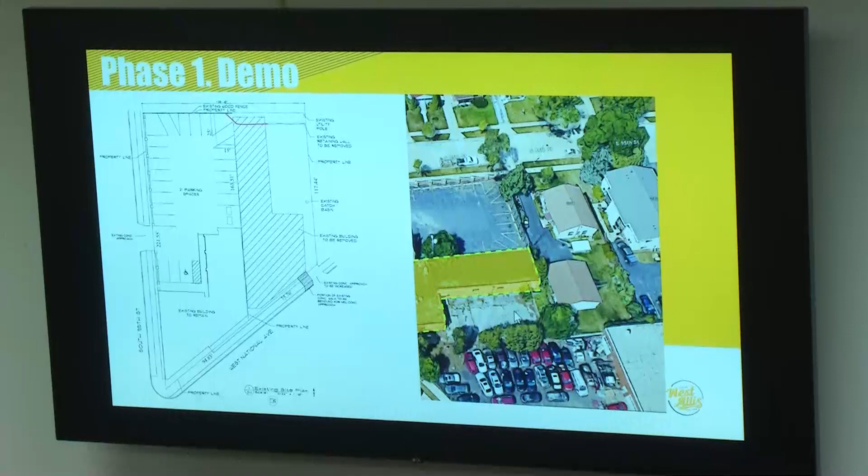But this plan just shows the demolition of the building, and then back here you can see some existing site features, an existing retaining wall here on the site, and the building is actually helping retain some of this grade difference between the residential property and the 9422 property. So when that building goes away, there's an interim plan to install an interim retaining wall, using 2 by 2 by 4 blocks, these heavy blocks you see sometimes on construction sites to shore up earth in a temporary manner. And then once the site is stabilized and the new parking lot goes in and starts to work, at the same time they'll be putting in a more permanent retaining wall along this side.

So here's a look at the site plan. One of the differences in the site plan is that the retaining wall was initially shown up here along the very north property line. Since that time, the plan is going to be amended. We'll be getting a revised plan, but essentially keeping the same amount of earth here and not putting in these stalls. In other words, the new retaining wall will be down in this location here. Some of these landscape islands will have to be amended, but the new retaining wall will be here, and then marry back up where it comes back into the normal grade between the two sites.

And then a new 6-foot high fence would be installed here, and also along the east side of the property. The refuse enclosure would be relocated from here over to here, and is also screened within a 6-foot-high wood fence.

Along the frontage of the property, there's a proposed landscape area and a landscape island within the site. This is a view of the retaining wall and fence along the north side, shown at about 2.5 feet tall, but that may change and vary in height as revised plans come in. With this earth being kept here, that will help further secure and shore up the property to the north, so it won't bear as much load. The earth will bear most of the load, and the retaining wall will do the rest.

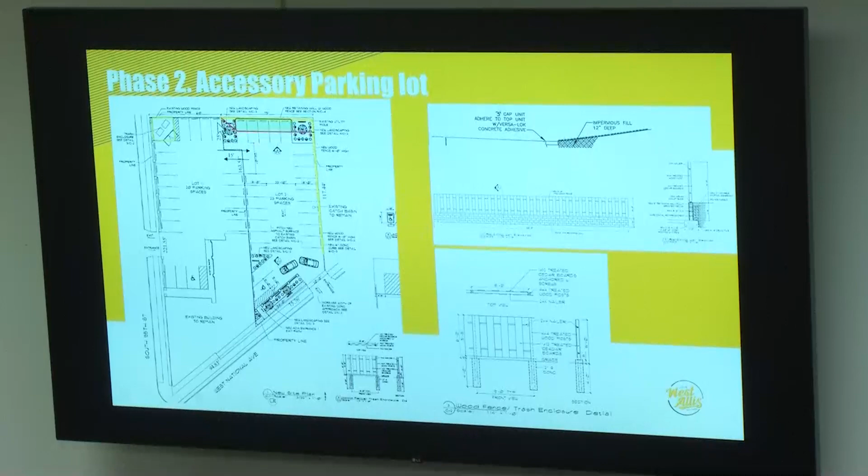That's the location of the future permanent retaining wall, and this is the interim wall that would be installed as the building comes down and this part of the building goes away. Those large 2x2x4 blocks would be installed here, again just so we don't compromise anything on the residential side and lose anything to erosion or load.

Let me just go back one too. This might help.

This is the garage to the north, about 4 feet away. This is the overhang shown here, but the wall of the garage is about 4 to 6 feet north of the property line. Here's the existing retaining wall that will eventually be replaced with a permanent wall. When the building goes away, the interim wall will go in right here, and then the permanent wall will also come across this area to take the place of what the building is doing now. There will also be earth in between the new wall and the property line, to further stabilize the site.

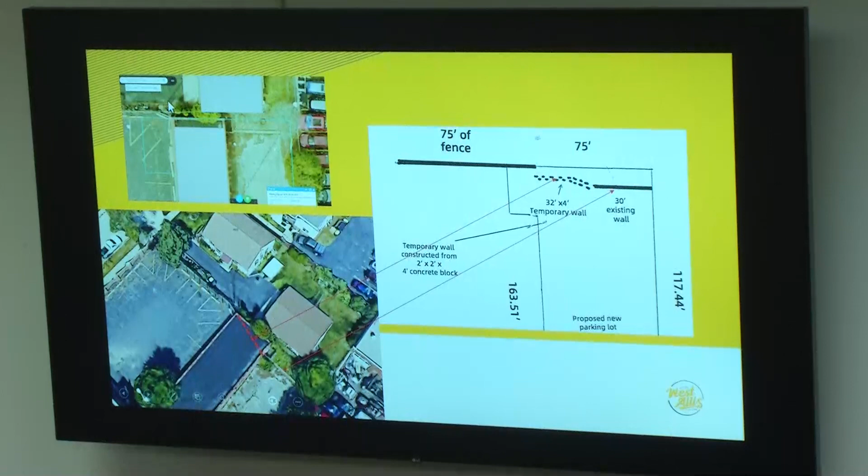So the revised plans we'll be getting as a condition of approval will be better at alleviating some of the concerns of the property owner to the north and further stabilizing the site for the future parking lot.

And then just a closer view - what we're looking at here in the bottom is a detailed view of this landscaping island along National Avenue. It features a decorative wall in the backdrop, and then landscaping with some ornamental trees, perennials and shrubs up in front, and a small terrace of grass in front of the landscaping area, with the sidewalk here.

There'll also be a cut-through from the parking lot out to the public right-of-way. So if you park here or anywhere within this lot, you could walk out to the sidewalk and into the main entrance of the business.

The wall will be a brick masonry style wall with piers and ornamental fence along National Avenue. And then this is the variety of landscaping that was shown - it's about 10% landscaping of the overall site, or probably a little bit more with this added back in.

And then when this building goes away, there'll be a stain on the east side of this wall. But the idea is, I think there is a little bit of a gap between the two buildings, so this will be evaluated at that point, and the idea is to clean it up and, if necessary, reinstall brick to match on this east wall of the Heartbreakers building.

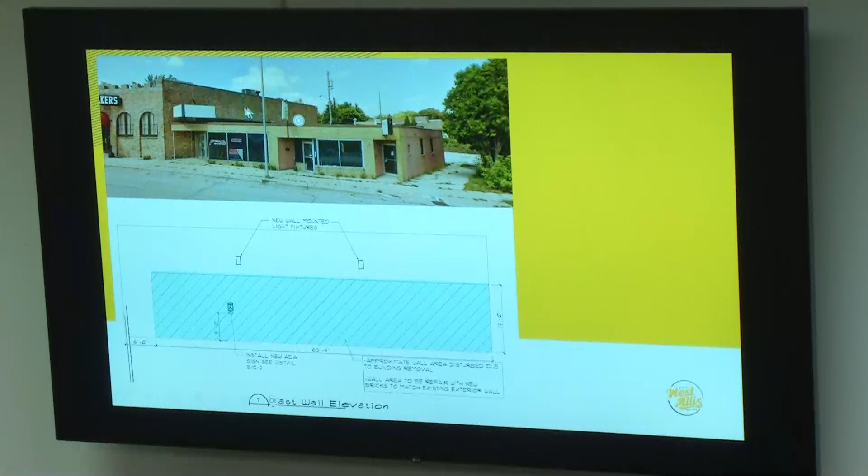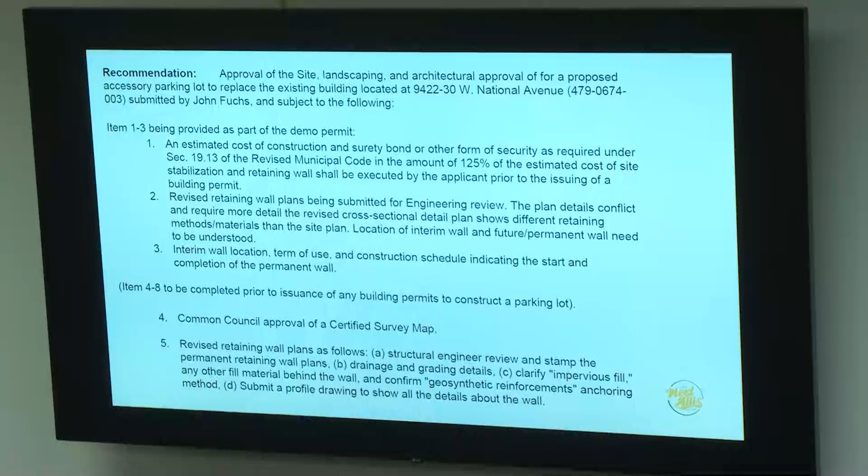So we're recommending approval, subject to the conditions in the staff report, items 1 through 3, broken into two parts. The first and biggest priority is to start demoing the building. We're asking for an estimated cost, a surety bond or letter of credit, and revised retaining wall plans to work out some clarifications, showing more detail on the interim wall, and also the timing between when the interim wall and the permanent wall will happen. We want to get that detailed.

Other than that, once the building is down and the site's stabilized, before the parking lot can commence, the two properties, which are separate right now - the Heartbreakers property and the 9422 property - will need to be combined into one lot of record. It does have common ownership now, so that clears the way and makes it easier to combine them via certified survey map. That will require council approval.

And then we just wanted our city engineering department and planning department to get a little bit more information on the structural capacity of the new retaining wall. I think a lot of those concerns have been somewhat alleviated, but we're still asking for confirmation of the structural integrity of the wall.

And then drainage needs to be explained, and then just clarifying some of the other details shown on the plan, just for a better understanding and comfort level of next steps going forward before the parking lot goes in.

And then this last item, item 6, is just in terms of the site plan itself. We're recommending a right turn in and right turn out from National Avenue. We really don't want left turns out of that new parking lot area or left turns into it. National Avenue, while there's been some major improvements for safety and aesthetics, it's still somewhat of a dangerous move to make that left turn movement.

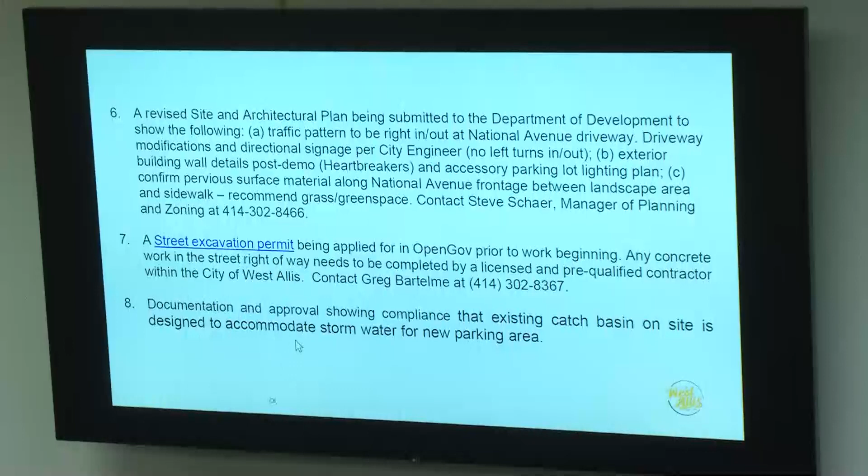Hitting the driveway or street excavation permit from our city engineering department, and just clarifying the catch basin that's in the parking lot just east of the building that's going to be demoed. It needs to be sized properly, and I know Mike's been taking a look at that catch basin right now, trying to get the right size lateral into it, so that'll be taken care of. But it's just a standard referenced item on this for approval.

So we recommend approval of item 1, of the demo and of the future parking lot, subject to pages 3 and 4 of your staff report, which are shown here. Thanks. Any questions? We can open up the discussion if needed.

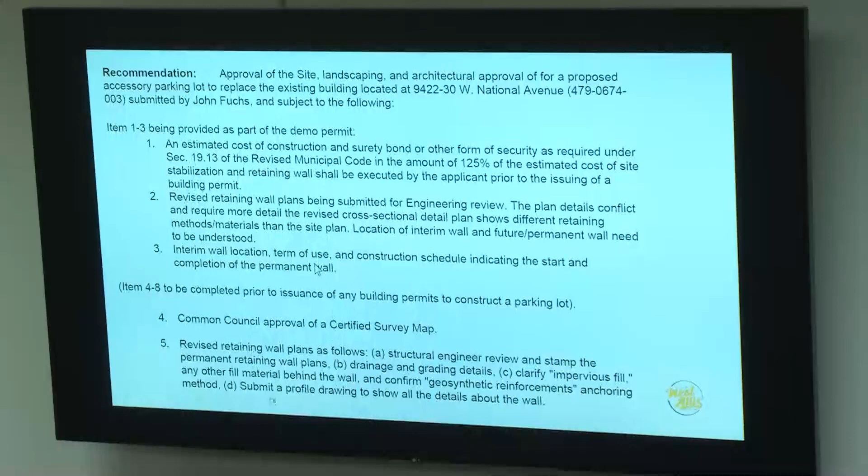Go ahead, Wayne. Mr. Mayor, thank you. Steve, go back to maybe the second slide you had. Sure. No, is it this one? No. That one? Yeah, right there. Okay, sure. What is, this is outside, this is to the east of the subject property.

What are all those cars in the lower section of that slide? Oh, that's the next door neighbor at 9400 National. I mean, what is that? That's the auto body shop. Is that Concours? No, this one is the other way, it used to be Besson Auto Body, and now it's something else. It's a new owner, new operator, and yeah, it's been a thorn, I think, in the side of our code enforcement department and planning department for years.

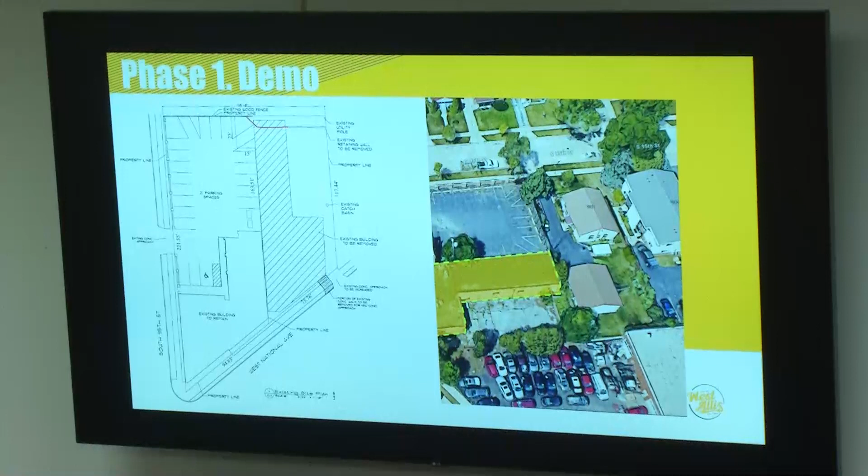I'm not sure, now that picture could be a bit dated, but it still looks like it. It's probably close to it. Maybe a few more cars, maybe a few less. Looks like about the same. It looks like a city junkyard. Yeah, and that's towing. Towing would not be an acceptable condition of approvals. Thank you. Sure.

Any other questions, Brian? Any addition, like for lighting or anything like that, as you're expanding out? You guys have, it's gonna be added to the new plans. And it'll obviously not splay over to the property shown there. It'll be contained.

Most likely it'll be added to the building, kind of like what he showed us, probably the best way to do it. He showed that on, I think there was some, on the top? No, where were they here? Further down, I think. Right there, some, yeah, one here and one there. Okay, try to get one on the backside too, so yeah, it covers the other parking lot.

It'll be, I mean, it's really important to make sure you keep those directed downward as best possible. We've received lots of lighting complaints on some new projects, especially with the neighbor to the north being up a little higher, so some of their windows may actually be over the top of that new fence going in back here. So especially in the back, try to get those lights directed downward as best possible. I know you've got to provide safety for your customers coming in and out of the place, but at the same time, it would be respectful to the neighborhood too.

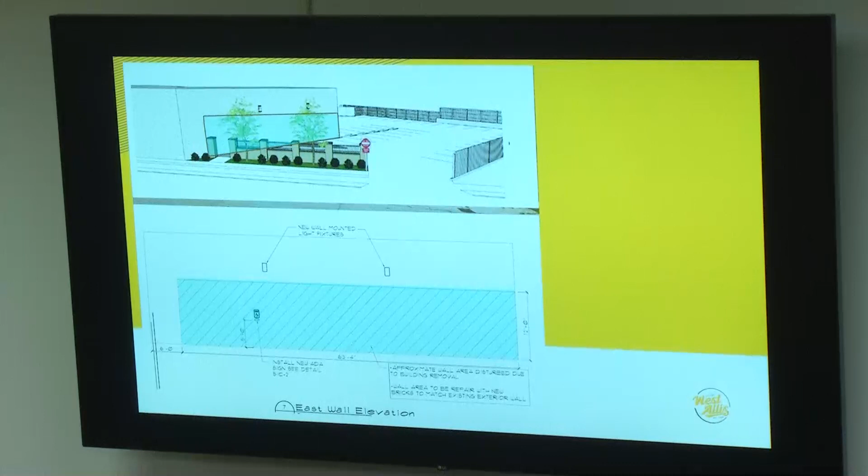Yeah, there we go, like this. Oh, okay, yeah. I never knew that, I don't know, I was just questioning, no problem, but I mean, yeah. It's, I guess we don't have to repeat what was done 40, 50 years ago. We can maybe just do a new looking wall that's complementary in color maybe, or something like that.

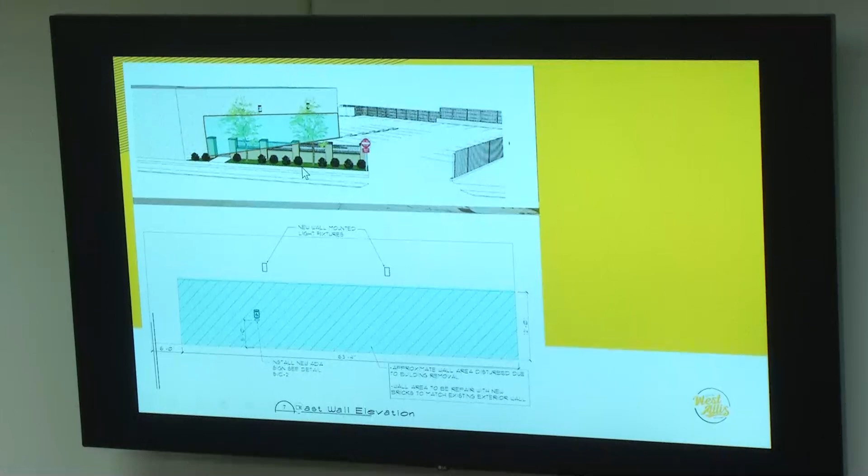Steve, could you go back to the current image? There, that one, yeah. I know at Heartbreakers there's not a lot of landscaping opportunity, but it looks like there's better maintenance opportunities at this new plan than there is right now. I think so, yeah.

Has the whole parcel been kept up, and have we had any complaints about their landscaping? It's been whatever's supposed to not be much there, just some potted things, the little right? shrubs, there's a couple spireas in the front, and some hostas, that's about it. But that little square right underneath that first arched window, yep, there's little 2x2 squares along there. It had some rotted granite in there for a while, but everybody throws their cigarette butts and everything else in there. What about the turn out of the parking lot?

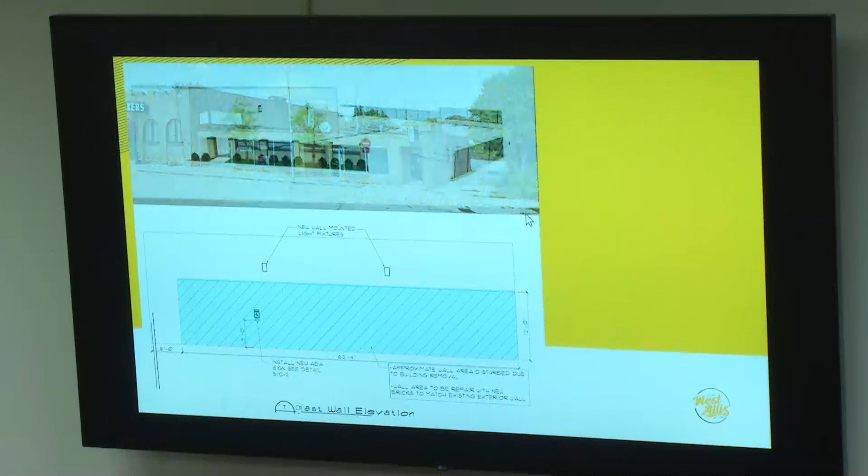Is there going to be any island or anything to prevent people from turning left into the driveway? Well, that's what we're trying to reconstruct. We're going to have no left turn signs and all that kind of stuff up there, but I'll have to talk to city engineering to see if there's something that can be done when they reconstruct this drive. Maybe there's a little bump or island, for lack of a better word, to prevent that. The new parking lot's going to have curb and gutter on the outside anyway.

Yeah, so that's why they're doing the curb there and the curb in the front, they can put a left turn or a right turn curb on there. I just think trying to turn left there, being so close to Lincoln and National, is pretty dangerous.

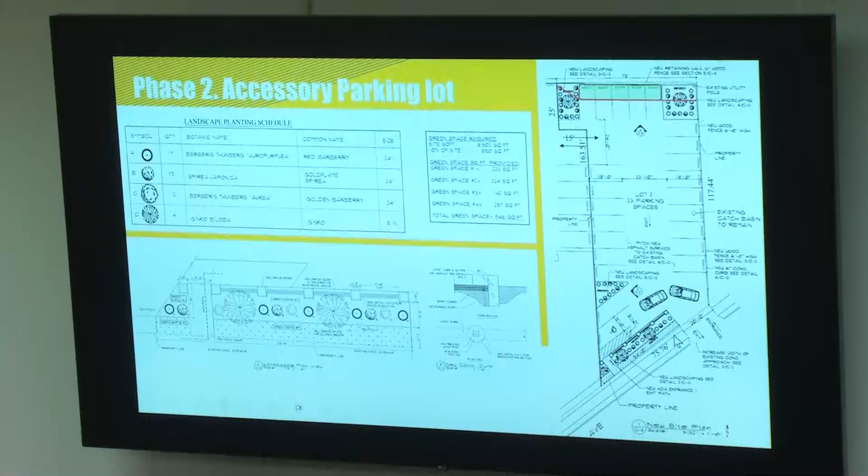Any other questions? Any motion? I move to approve with conditions. I'll second. We have a motion and a second. If there's no other discussion, all in favor? Aye. Any opposed? Ayes have it. Motion carries.

I think it'll look a lot better than what that building looks like right now, no matter what.

Mr. Mayor, regarding the issue about the turning, isn't that something that maybe, working with the city engineer, they could consider doing something like was done on Cleveland? A possible island extension, do it ahead of time rather than wait for an accident. Oh, you're thinking within the street median itself? Yeah, like on Cleveland, west of Highway 100.

Seems to me that's certainly a barricade, you can't get around that. Yeah, that takes no prisoners. That part of National in front of Heartbreakers, it has been done. Does it go all the way east though? I'm trying to think how far it goes, that little island. I know Lincoln Avenue is going to be redone, but that part of National may have already been taken care of.

We can discuss it further, we're going to be talking to city engineering about that anyway. What if you just put some of those little orange permanent things in there too? Yeah, I just want to make sure it doesn't end up creating more work for our DPW department to pick them up every time a plow comes through or a car wipes them out. But as long as it's in the discussion, that sounds good.

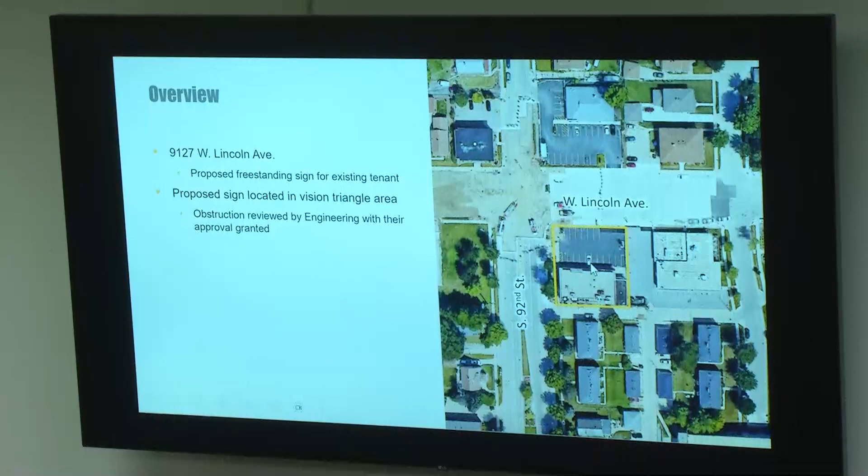They are proposing a monument sign on the northwest corner of this parcel. It's located within the vision triangle, which is currently within our zoning code, considered an obstruction, so our engineering department had to review this as part of the permit process for this sign permit, and they are required to go before Plan Commission as well. There has been a precedent set by previous Plan Commission meetings where such signage has been approved as long as it conforms with our sign code and with engineering approval.

City engineering, since the staff report was released, did approve the location of the sign within the vision triangle. With that being said, there are additional conditions that staff are considering, such as removing non-conforming signage along the western wall and on the property in general, and then submitting a landscaping plan. But with that being said, staff are recommending approval. Thanks.

Thank you. Any questions? So, I'm sorry, it was at a point, so when you're turning, you can't see it? So it's at a point, right here, when you're going either north on 92nd Street or west on Lincoln, there's a point where you don't have full view within the vision triangle, but the way the sign is placed and angled, it conforms with our safety guidelines per the engineering department.

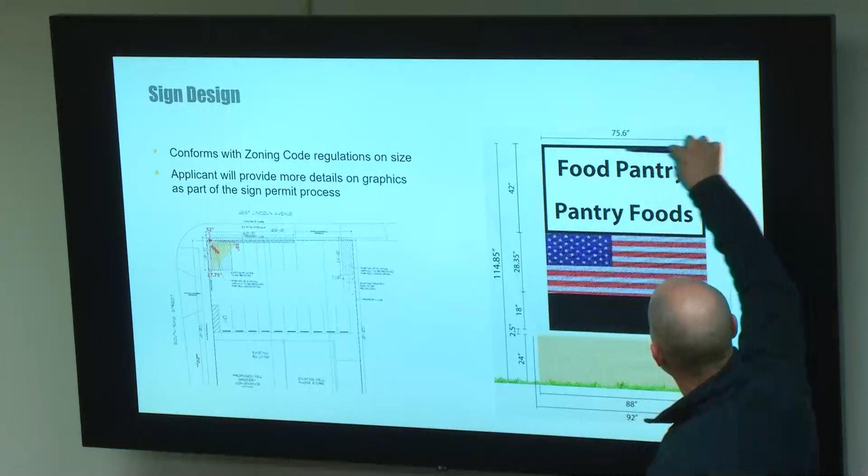So those are the kinds of things that, you know, we're here for the appeal mainly, but those are the kinds of design things that we'll be working on with the contractor on the actual aesthetic. He responded to us saying they'll be able to conform with our request, whether it's getting a better design or just a new design in general.

This is just for the location of the signage. And it is 92nd and Lincoln, so we want it to look nice. Yeah, go ahead, Wayne. Thank you.

This appeal is because we rejected this very sign earlier? No, this appeal is because they have a current sign, but it's a bit smaller and outdated for what the applicant and the property owner would like on the site.

So they're proposing a new sign, and because that sign is within this vision triangle within our code, they're required to go before Plan Commission just to appeal that location, as long as engineering is deeming that location acceptable.

And the existing sign that is to be removed, where is that? That is one of those, it's about right here, it's not diagonal. Okay, well there's another one. I think there's another one too on the north. Yeah, what is that? North.

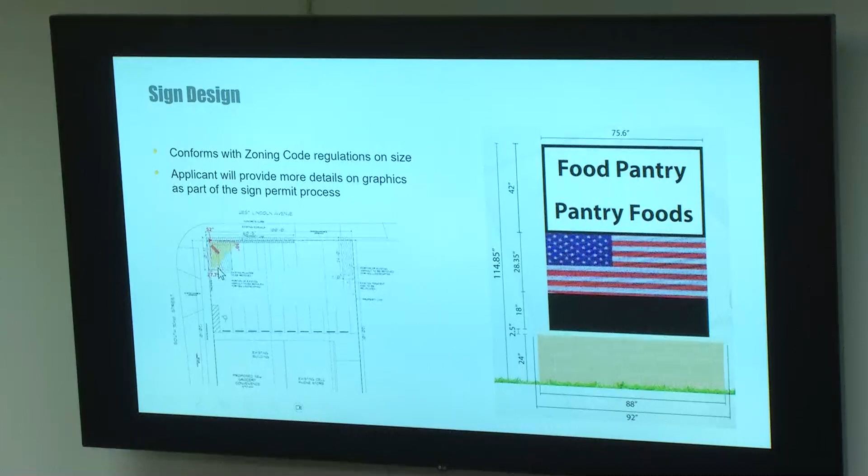Both of those will come down? Yeah, yes. Thank you. Any other questions? Move approval.

We have a motion, we have a second. If there is no other discussion, all in favor, please say aye. Anyone opposed? Ayes have it, motion carries.

Move on to item 4. Thanks, Mayor. Our next item is a certified survey map for Michael's restaurant property. The Michael's restaurant property is here, and then back in, was that December or January? I think it was December.

They were here before the Plan Commission seeking conditional use approval for a food truck park that looks like this on this corner over here.

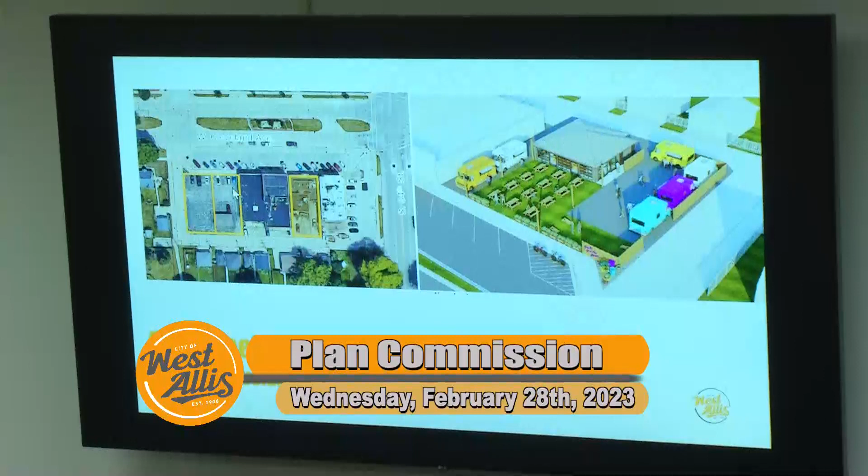This is owned by the same owners as Michael's. The food truck park is actually 2 properties. It looks like one parking lot with a garage on it, but there's actually 2 parcels - one with some parking and a garage, and another with just parking on it.

But once consolidated via CSM, it would set the stage for just one property upon which they would add onto the garage for ADA men's and women's bathrooms, an expanded tavern area, converting the garage to a tavern for the food truck park, and then building out the outdoor patio area and space for the food trucks.

I'd move approval. Second. Thank you. If we could, just approval subject to technical corrections - we've got to take that to common council again too, so subject to technical corrections and common council approval. Thank you. Sure.